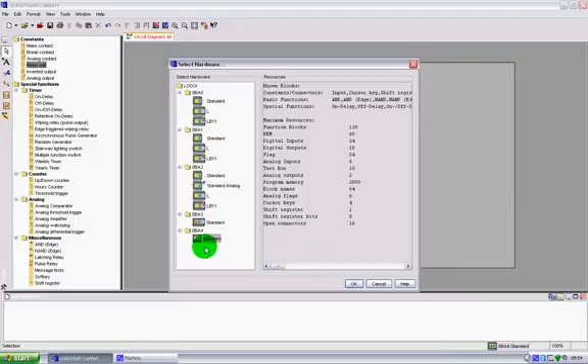This gives me a couple of analog inputs, 8 in fact, and a couple of analog outputs as well. So what we'll do is we will just create a simple little program.

We'll put in - you notice on the left hand side here we have now got a lot more objects that we can place in our program. If you remember from the previous videos, this had been minimized due to the type of PLC or the type of smart relay we were using.

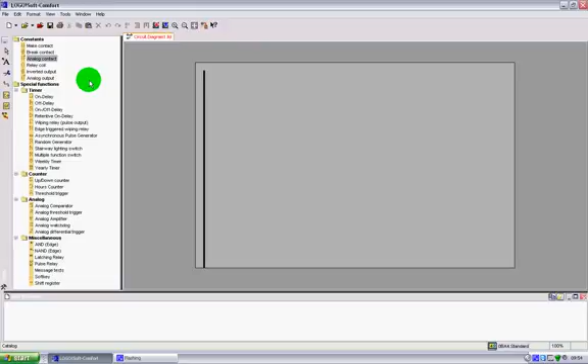So to begin with, what we're going to do is we're going to put in an analog input. Okay, so we choose our analog input as number 1, and we will just wire that up for the moment.

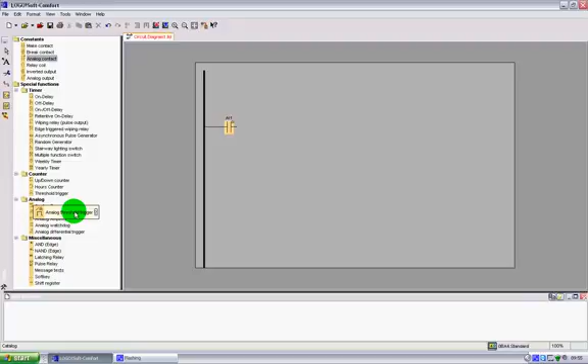And what we will do is put in just a threshold trigger. Okay, so we'll just add in a threshold trigger there and we'll connect that up.

Now what we want to do is when we reach an analog threshold, we'll have an output that is switched on. So it could be, for example, a level measurement in a tank, and if we reach a certain level then it triggers a high level alarm or something along those lines.

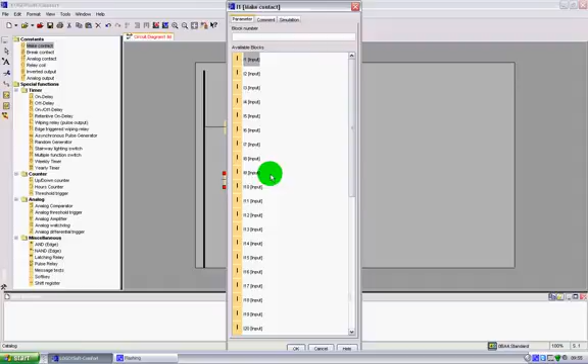So what we need to do is take a contact from this, so we'll take a normal make contact and we'll place that into there, and out of the list we'll just move that to one side. Notice the name of it here, SF001, which is just there.

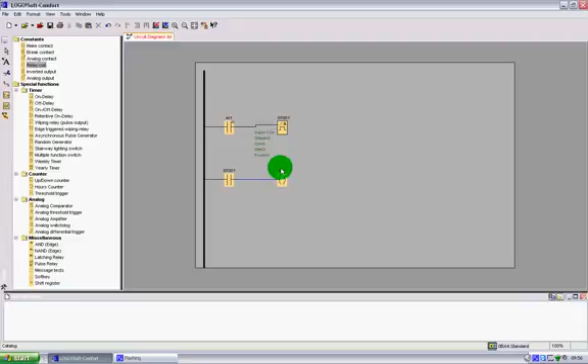We'll click that so that contact now comes off of this one. Quickly just wire that one up, and we will take a simple relay coil and add that, and we'll leave that as Q1. So basically now we need to set up the analog.

If I just double click this now, this analog threshold trigger, you see now that you get a page coming up with all your analog settings.

So we'll choose - well, you can choose anything by selecting from the sensor. It could be a PT100, it could be a 4 to 20 milliamps or 0 to 20 milliamps or 0 to 10 volts. Just for ease we'll leave it as 0 to 10 volts.

Minimum and maximum you can set depending on what the output of your analog thing is, and then you can set your gains and your offsets here.

What we'll say is that we want it to come on when it reaches 9 volts, and we want it to go off when it drops below 3 volts.

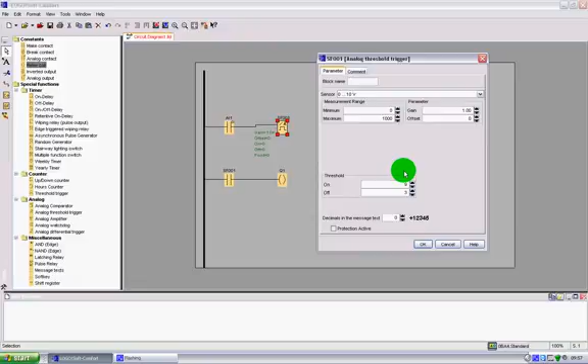So that gives our high level signal a variance that we've got to empty the particular storage tank down to a certain level before the alarm goes off, and we'll show you how this works now.

So we've got a basic little circuit there. If I press F3, that'll put me into simulation. Now I'm going to set my analog down to 0, and you notice that the value of that trigger is 0 at the moment. The analog is not doing anything for us and our output is off.

So I'm going to slowly raise this up. Notice that our output here, Q1, is still off, and we're going to reach it, and once we get to above 9, in other words 10, we're above 9, our little trigger triggers. Our contact goes on and our output goes on.

The output now stays on until - and as you see I'm now lowering the input down, and it comes off at 3.

Okay, so that's a simple little PID if you like, but it's a simple little analog input to an output circuit.

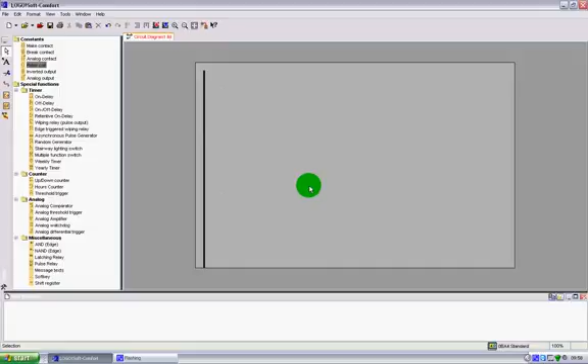Let's escape that one, remove those for now, and we'll do a comparator. The comparator is very simple but looks a little weird. Let's put our analog contact back in. We'll use analog 1 again, and we're going to use two of these, and this time I'm going to use analog 2. I'm going to quickly wire those up.

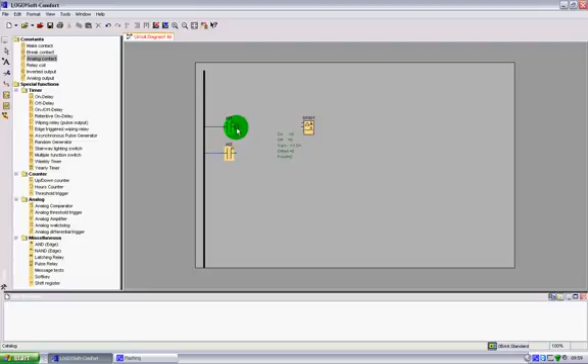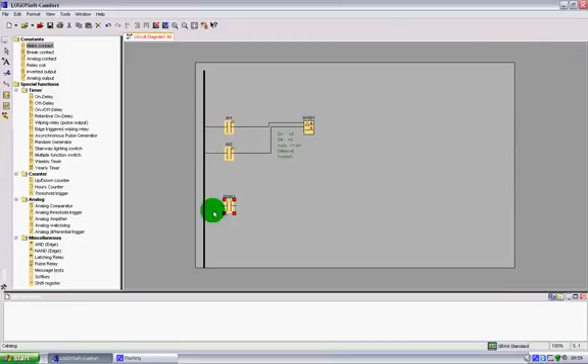Now on a comparator, you have AX, which is one input, and AY, your second input, because you're comparing two inputs together. We'll have a make contact again, and this time we'll make it our analog comparator. I'll quickly wire that up, and we put in our relay coil as well, which we'll keep at Q1.

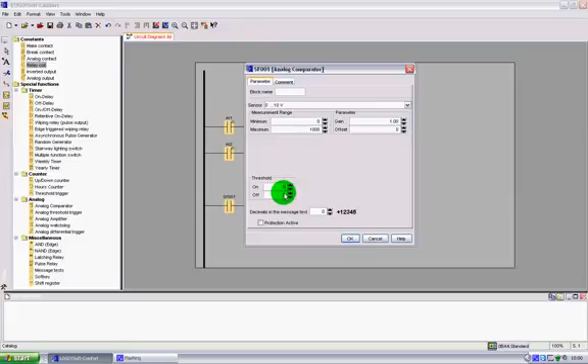Now if we double click on that, we get our simple page up again. We'll leave everything the same here, but we'll say that we wanted to switch on at 5, and off at 3. Notice here that there is a difference between the two of about 2 volts. That's going to be our threshold. Because we're working 0 to 10 volts, we're going to have a difference of 2 between 3 and 5. Okay, escape and F3.

Now when we reach on analog 1 above 5, in other words 6 volts, our comparator has got a difference. If I increase our analog 2, the difference between our units is now 3, so it goes off. If I raise that up again so that we've got a difference, our comparator triggers and our output goes on. And if I raise the analog so that we have a smaller difference of 3, again our comparator goes off and our output goes off.

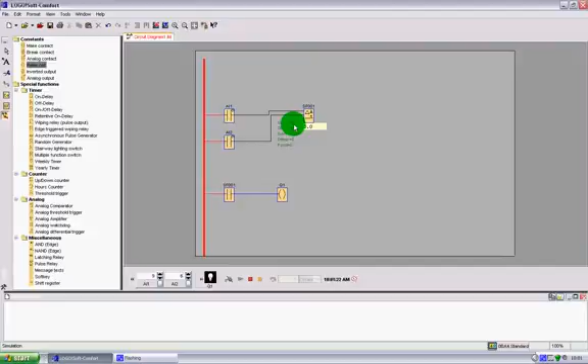So you can see that setting up the comparator, you can have say two sensors or two temperature probes, and if there is a difference you can switch the heating on, and when it reaches a certain level you can then switch it off. Okay, those are the basic ones, and the analog amplifiers and so forth, you've got one input,

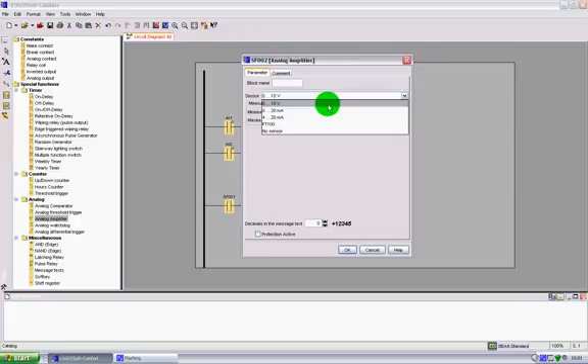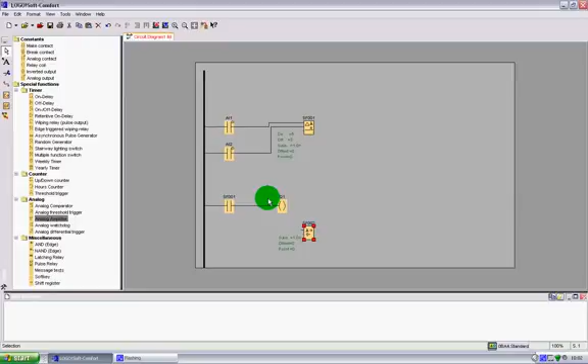and if you double click them, you can now set up your maximums and minimums, and again you can trigger those once they reach certain levels. Or as an amplifier, you can set the values to be 10 times more than what the inputs are, and then you can use those to trigger comparators or outputs or anything you like.

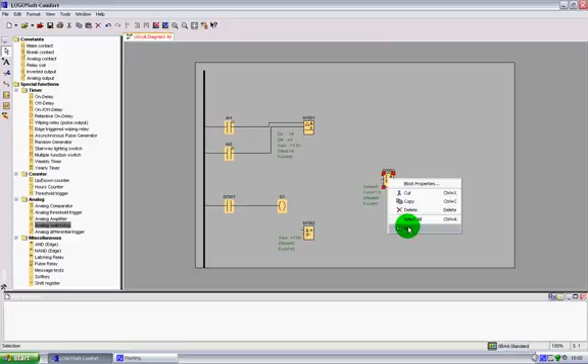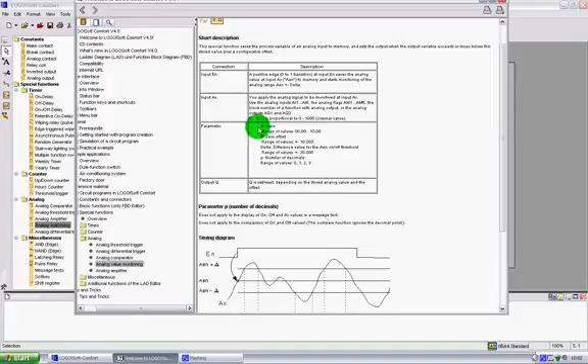There are a few there, all very similar, watchdogs and differentials. If you're not sure about some of these, if you pull the watchdog out for example, you can right click, select it first, right click and go to your help, and the help file comes up. Let's just open this up, and it does give you quite a good explanation of what that particular object does. It gives you the inputs, the parameters that you need, and how the output will work, and normally gives you a nice little diagram based on those parameters and the inputs.